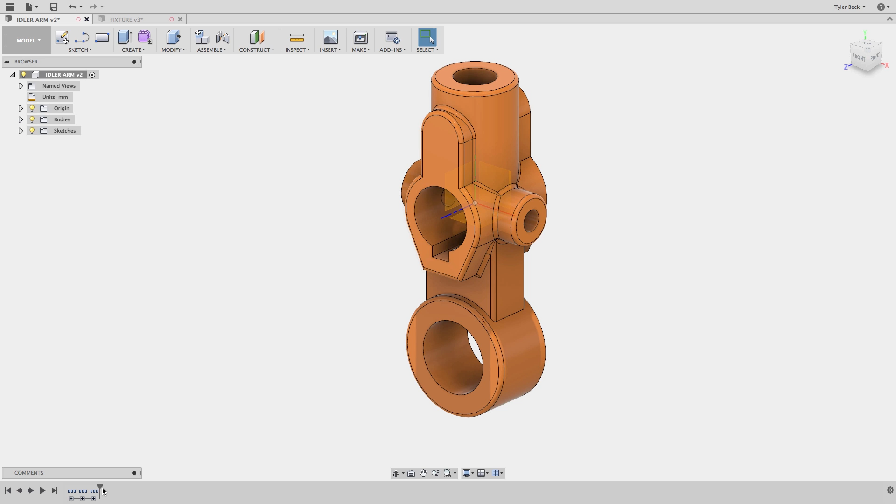Okay, let's look at the idler arm. So when you're first getting started with basic part modeling, working in CAD, these types of models can be really intimidating. But the important thing is to break it down mentally in how you're building it. You don't try to build this in one feature; this thing would feel impossible. So I break it down into solids first. That's still a little intimidating. That's much better. One profile, very simple.

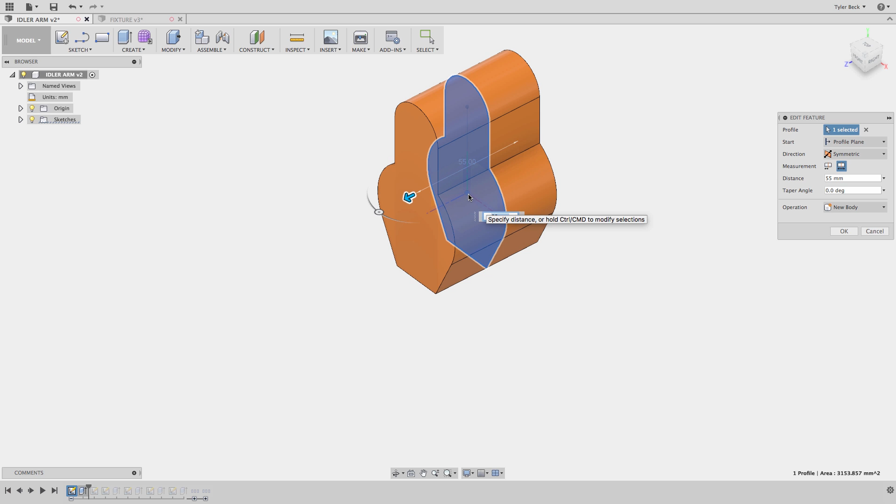I'm going to use the origin and I'll extrude it. Keeping my origin in the center by extruding this symmetrically about the origin, so I extrude it both directions. I'm extruding it both front and backwards equally. And that keeps the origin right in the middle, keeping my planes right in the middle. That'll make my life easier later.

Okay, the next profile that I want to do is just a simple cylinder coming out of the sides, and then another one coming out of the top, and finally this base and the bottom cylinder. Okay, that's not that hard. It wasn't that bad. It'll take you a little while to sketch everything out, get everything dimensioned, but we add our cuts. Again, those aren't that hard either. And the fillets.

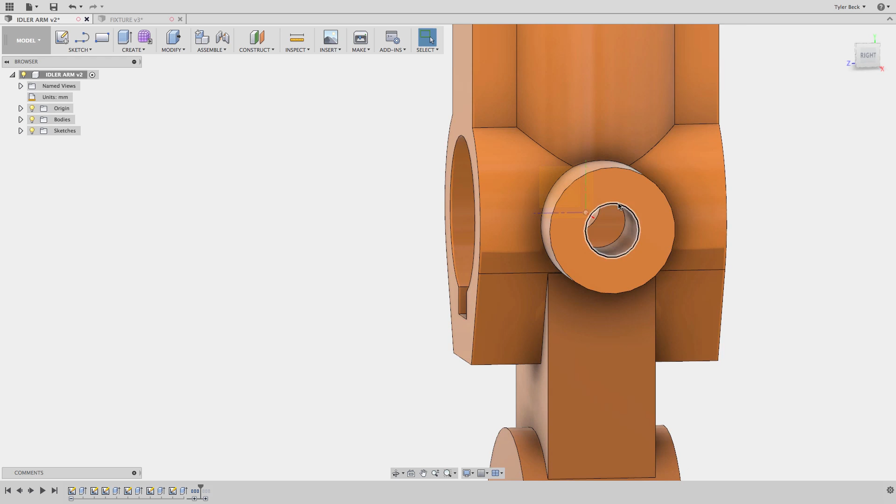Okay, so back to our framework. Why would I say you have to do all the solids, wait to do the cuts, and then wait to do the fillets and the chamfers, everything last? Notice this keyway slot hole in the front. It's really easy, or even, let's look at this side hole, that's even easier. Why in the world would I separate that into its own cut? Why not just do it all at once? It's faster, right? Let's try it.

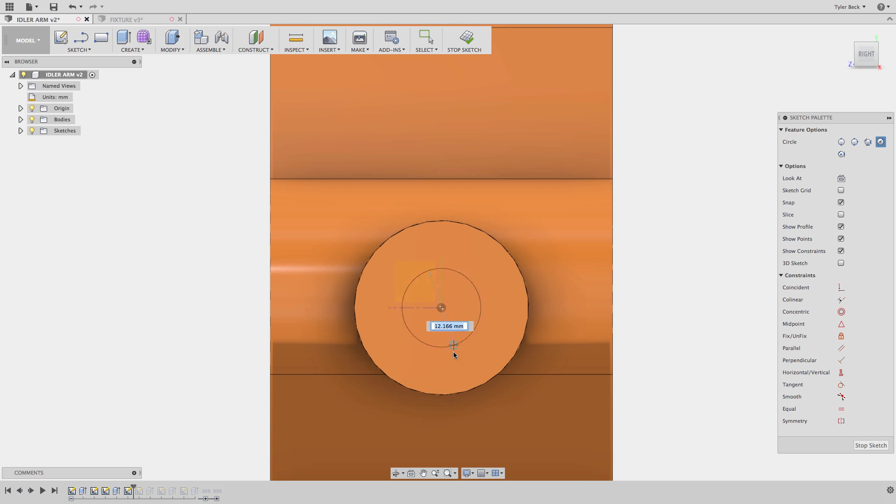Why not, before I created anything else, why didn't I just add an extra circle in that sketch? We'll just add a sketch in the timeline right now. I could go back and edit it. That'd be just as easy. We'll go all the way through, we cut it. It's done. See, that's so much faster. So much faster. But it's gonna bite us.

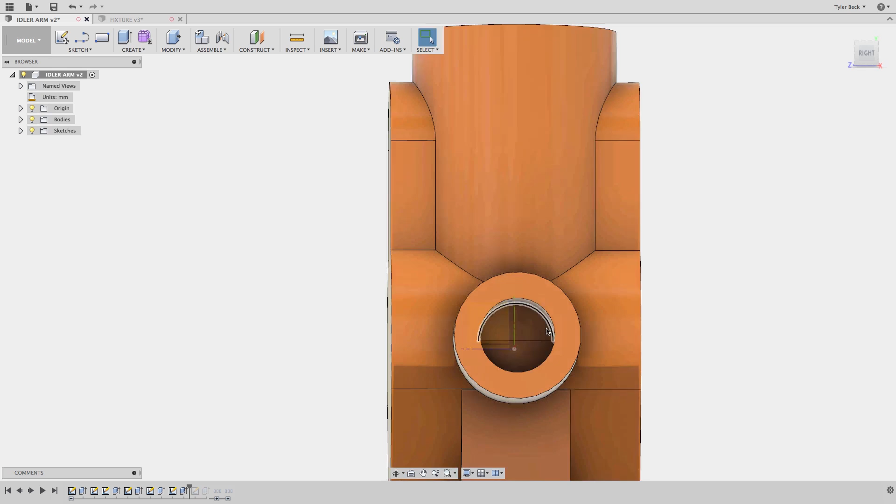As soon as I add the additional extrudes that all come from the origin, you start to notice that it gets filled back in. There's material back in there, so I have to do the cut all over again. The shortcut wasn't faster after all. So this is why I say build those solids first, build the solid shape, then add your cuts. Okay, getting rid of that. Now we've got it built the right way. We have all of our solids and then our cuts.

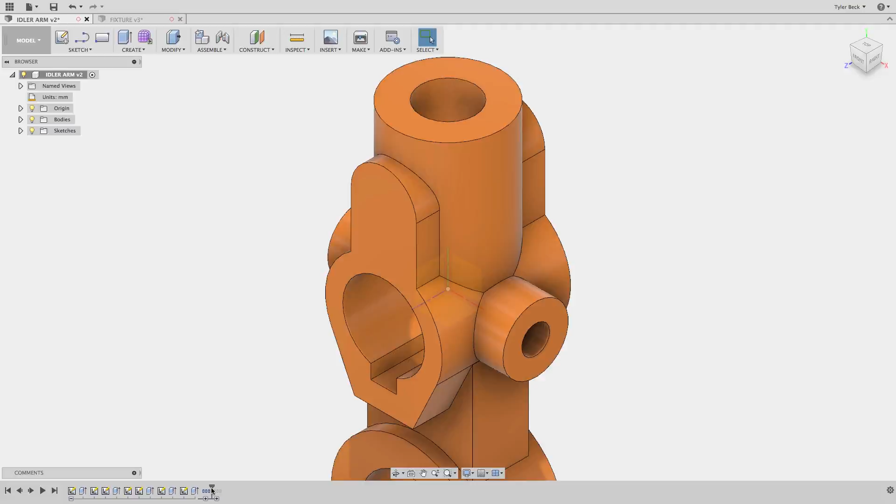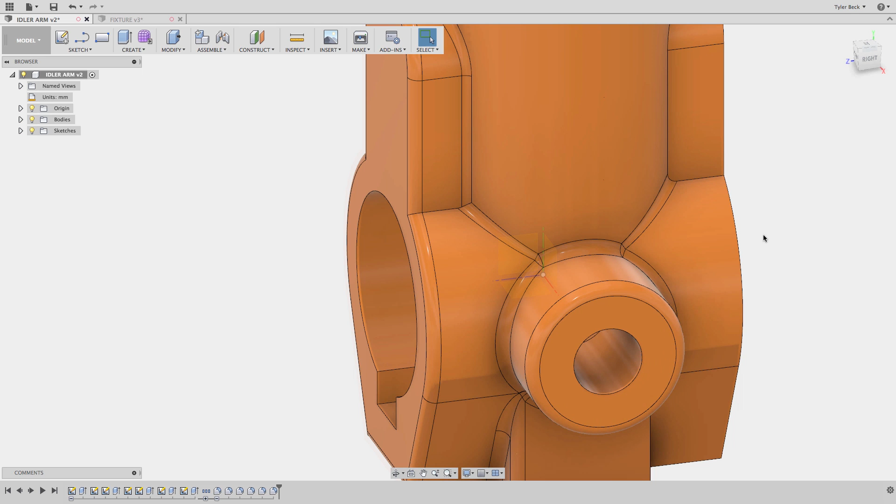Now for the fillets, it's going to work the same way. You don't want to try to do your fillets early on. You want to do those after everything's kind of in place. Fillets are incredibly sensitive to the order in which you do them. I was unable to do all of these fillets in one feature, even though they're the same radius. I have to do them in several fillet features. I do it a few steps at a time, I apply them, and then I continue to add more.

Now, as you can imagine, if I was still adding this cylinder in after the fact, that's gonna break all my fillets. It's gonna break anything it touches, not worth it. So again, do those things last.

Now, another great advantage of doing this methodology is it allows you to understand everything. It allows you to group your design history in a nice, organized fashion. I have all my solids, the sketches and extrudes, in one grouping. Easier to edit, easier to understand. I even labeled it solids. The next one I've labeled as cuts. They're grouped as cuts. And finally, I could even group all my fillets together in one grouping, having them organized nicely.

So as you can see, the cool thing about doing it this way is it allows you to attack your model in a simplified approach. Build out the solids step by step, then go in and remove the material you need to, and finally, add those fillets and all that finish work there at the end.